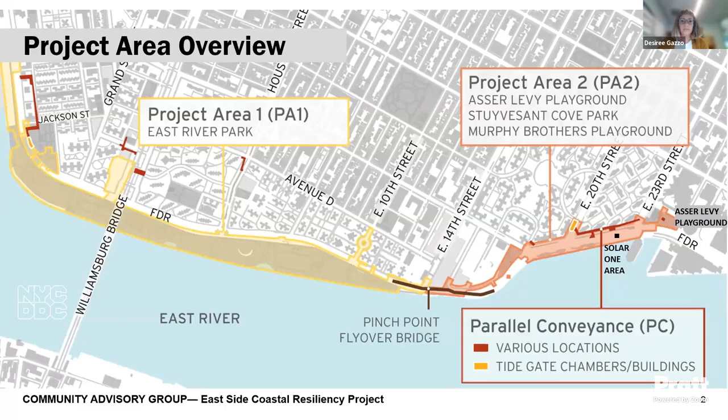As you know, this is the project area overview. The focus area topics that we will discuss tonight are construction, environment, access, hiring compliance, and then any questions.

So for Work With Us events, there have been quite a few this month. On October 4th, we attended the Henry Street Settlement Job Plus in-person job fair. On the 19th, we had the ESCR first quarterly in-person career pathways event.

We had also attended, at the end of September, the ESCR DDC forum which covered the resiliency projects. I don't believe we have the slides for that yet—we just received them, so I'll make sure they're up on the website tomorrow. And then the last hiring event or MWBE event is the Competitive Edge Conference on October 31st, that's on Monday, and DDC representatives will be there as well.

The Henry Street Settlement event, good news was IPC representatives were there and they were able to fill the open administrative position with a local candidate from the job fair. So that was a really great plus for the project. As you all know, we have been coordinating with Henry Street Settlement on many of our quarterly events, so it was really great that they invited us to this in-person job fair.

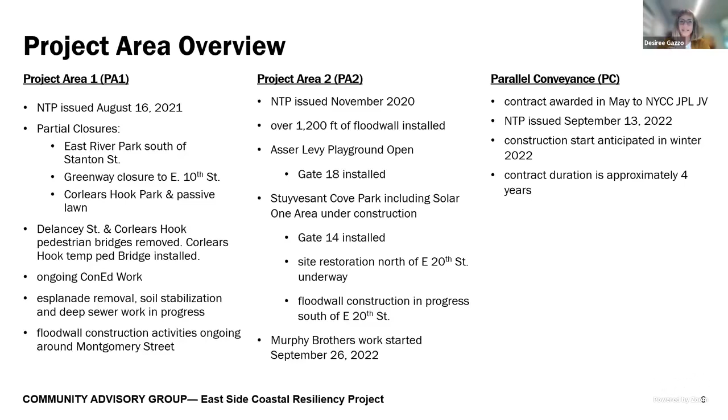For parallel conveyance, we would like to introduce, for those who were not on the CB3 meeting, the community construction liaison for parallel conveyance. Tanya, are you on? Okay, perfect. Tanya, if you want to introduce yourself to the group. It looks like we have quite a few people on tonight, so if you want to give a quick introduction, that would be great.

Sure, good day to everybody. Thanks for having me. My name is Tanya Wokun. My experience in construction began 7 years ago, where I worked for New York State DOT in the rehabilitation of the Major Deegan Expressway Bridge across Yankee Stadium. I worked there as an assistant office engineer and a CCL. Recently, I completed a 3-year water main and gas line installation in Manhattan also. Looking forward to work and meeting you. I would like to wish everybody a pura vida, a Costa Rican saying for healthy and pure life. Thank you for having me.

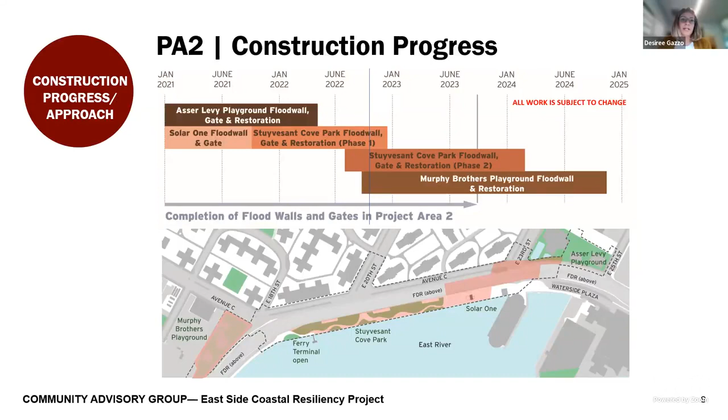For PA2 construction progress, we are moving right along. The Asser Levy Playground is open. Flood wall and floodgate number 18 is installed on the West Service Road. Much of that flood wall construction is completed or near completion, and the floodgate number 17 work is in progress. The anticipated completion for the West Service Road work is spring of 2023, which is really great news for that area.

At the 23rd Street intersection, the utility work and flood wall construction is ongoing. We have 2 gates at that intersection, 15 and 16, so that work is upcoming in the new year.

Down at Stuyvesant Cove Park, the seat wall construction, grading, and finished pavement is well underway, with planting starting the week of October 31st. That's very exciting. The Greenway construction is just finishing up, and that northern part of the Greenway is going to open next week, scheduled to open, and we have slides on that coming up. Before the end of the year, the northern part of Sty Cove Park is scheduled for reopening.

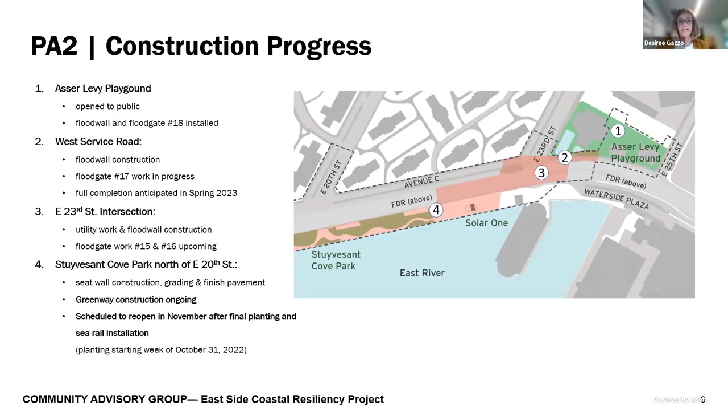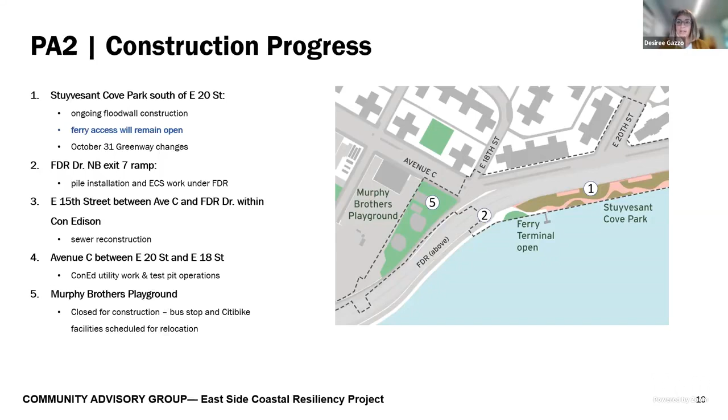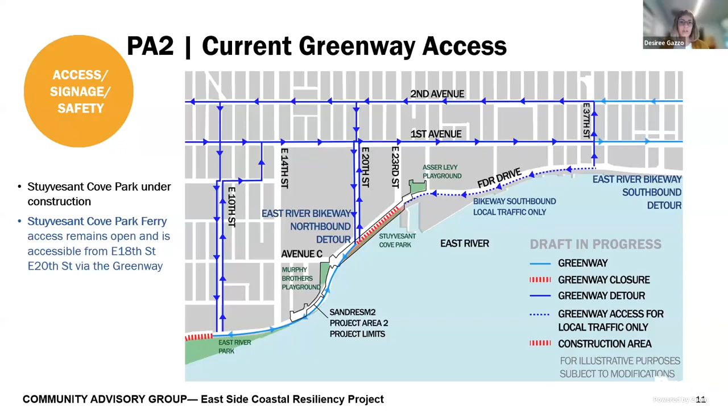So right now, again, we've shown these slides before. We have an update on the next slide, but this is the current Greenway access, which everyone is very familiar with. Starting next week, and the advisory went out 2 weeks ago, the Greenway access will change.

The Greenway north of 20th Street will open, so that's over here, north of 20th Street, and then the Greenway south of 20th Street, from East 20th Street to the East 18th Street Avenue C loop, that part will close. There will still be access to the ferry terminal here, and there will still be access to the southern area, to East River Park, and to PA2 down here.

So this will be the configuration for several weeks, and then closer to probably mid-November-ish, we'll come back with some more detailed closing date. The contractor will need to move into the lower part of Stuyvesant Cove Park, and then that connection will need to close between Project Area 1 and Project Area 2. So then the revised Greenway detour will be activated until that work over there is completed.

And just to zoom in again, once the ferry terminal access closes here, there will likely be ferry terminal access provided from the other direction. I think we're still working on that with the contractor, but that ferry terminal access will be available throughout the construction. And again, we've talked about this work at past CAG meetings as well, but now that it's coming closer, we did want to bring it up again.

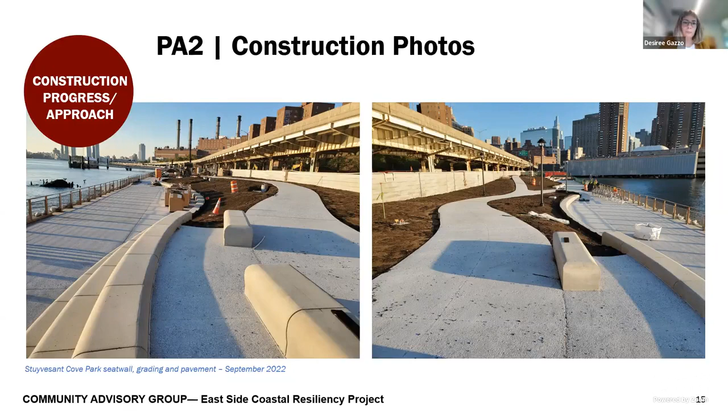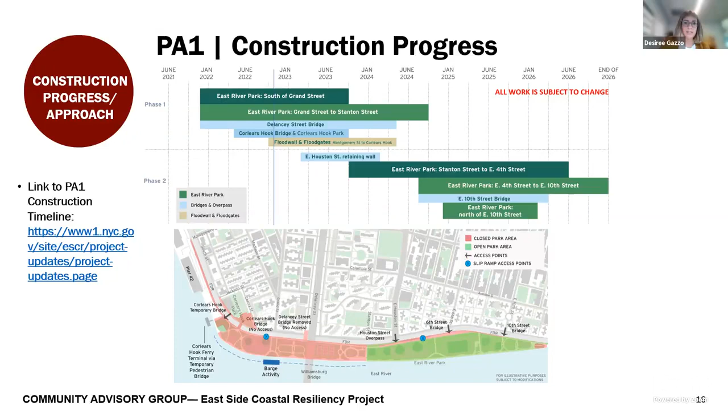For the November 2022 construction activities, again, much of the construction is ongoing out in the field. The soil stabilization activities are still ongoing. The flood wall, which runs under the park, under the fill that's in the raised East River Park, that installation will begin later next month. So that's exciting because we'll have more of the flood wall being installed there.

Again, many of the other items here are ongoing work activities. The Montgomery Street to Cherry Street Greenway flood wall activities are still ongoing, and we have a couple of photos in the next couple of slides. The amphitheater asbestos abatement has been completed, so that's great news too. Work can continue in that area.

A good update, the Con Ed work in the shared use path up at the northern section of the park is scheduled to be completed this year. It had been originally anticipated that that would go into next year, and it looks like it will wrap up this year. We are still having conversations about what that looks like for what parts of the shared use path might be able to open.

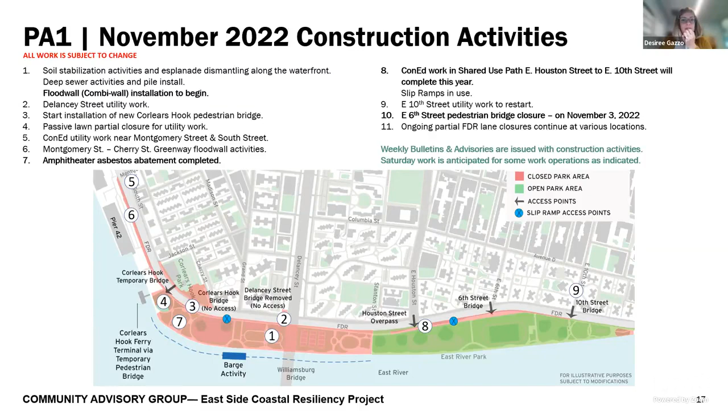Moving into 2023, much of the work we just went over will be continuing. The Delancey Street work is scheduled to pick up to start rebuilding that bridge, as well as work for the Corlears Hook Bridge. The flood wall activities will still continue, and we're hoping to begin flood wall construction near Montgomery Street and South Street at that intersection, also going into next year.

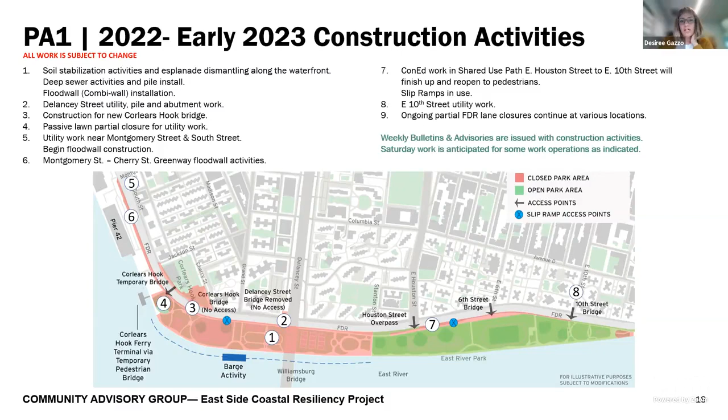As we mentioned about the shared use work, we're looking at what that looks like, what that reopening looks like with the contractor. So much of the work for the beginning of next year will remain similar to what is happening at the end of this year.

Just to go over the work sequencing: the flood wall we were speaking to isn't always in the same spot, but the combi wall is the next step here in the waterfront and Esplanade construction, true to the illustration we've been providing. Then comes the flood wall and pile installation.

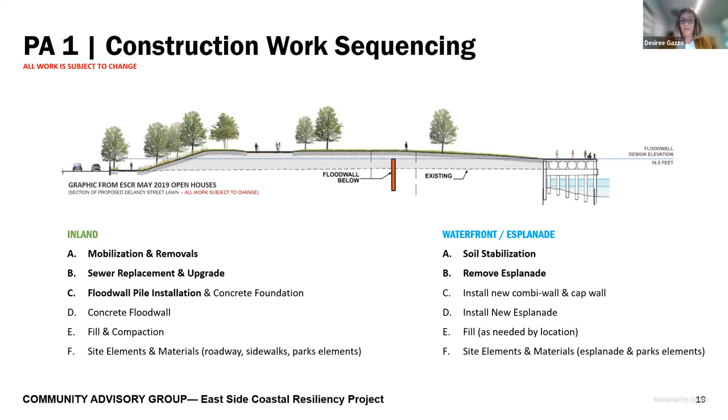Next will be the concrete foundation, and then eventually you'll see the wall. If you look on site, you'll see the mock-ups of the wall they're doing in the middle of the site, which we talked about last time.

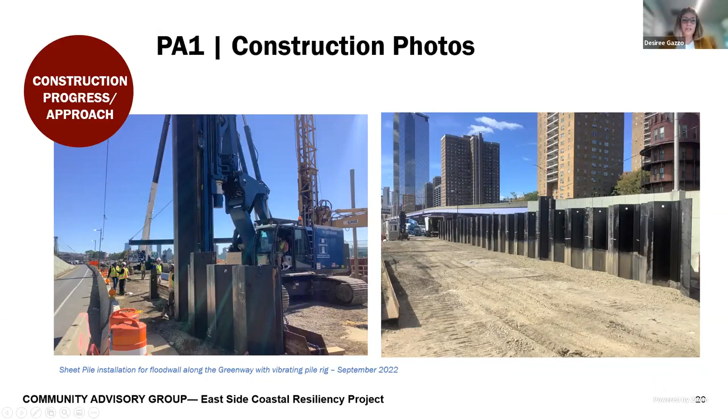So just a few construction photos. These are the sheet pile installations for the flood wall along the greenway with the pile rig, and this is a vibratory rig. It's pretty close to the road, so if you drive over here or live across the street, you have a good view of it.

We wanted to provide some photos for those who are not. This is some of the H pile installation for the deep sewer work. This is the H pile getting lifted up, and then it will be driven down into the ground where the deep sewer work is, to form that frame for the sewer to sit on.

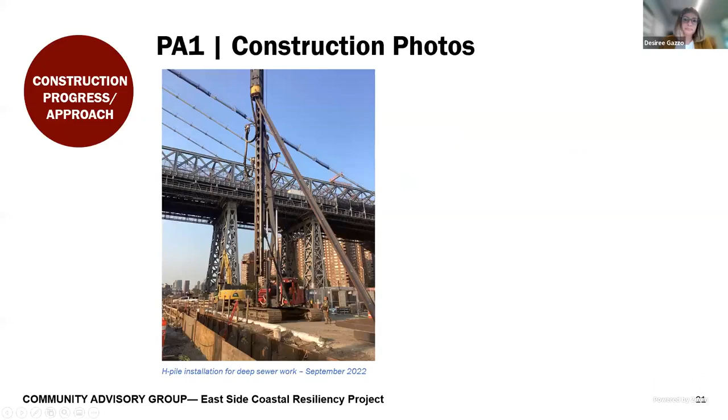Now going into the environmental updates. Taking comments back from last month, we tried to be more specific with the locations of some of the exceedances. The PM daily value did not surpass the PEL for the month of September for PA1 or PA2. Many of the alerts we received were around the 15-minute mark or less, and again it was due to construction activities, with dust suppression techniques applied.

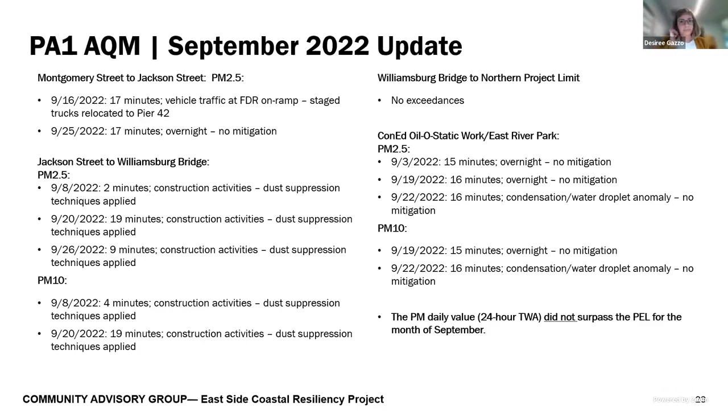Some of the work down by Montgomery Street to Jackson Street was related to the Pier 42 work going on there. There have been complaints about many trucks in that area, but those are not ESCR trucks, so the one or two exceedances there were in relation to the Pier 42 trucks. Many of the other ones were due to typical construction activities, and additional dust suppression techniques were applied. I hope that helps a little more.

So it wasn't concentrated in any one particular area, which I think was the question that was kind of asked last time. So we tried to speak to that in the slides a little differently than last time.

And we didn't take questions in the middle because that's it, that's the last slide, and we could take questions now. It was a relatively short presentation with not a lot of new information, so we didn't break it up halfway through like we do sometimes. So I hope that's okay. And then we could take any questions if there are any.

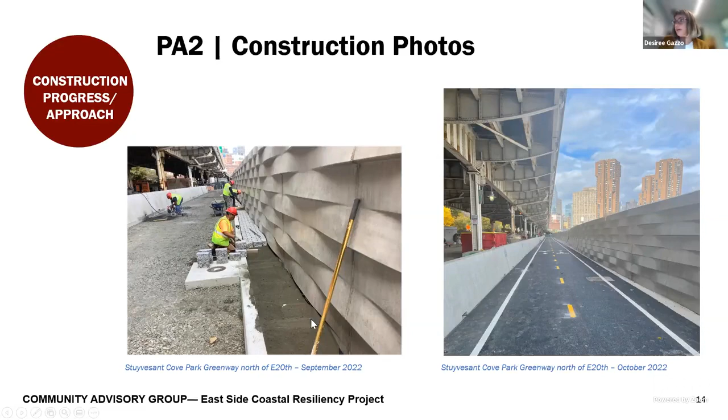So it's the same as it was previously. The access to the greenway is at 20th and 23rd. Let me see, where's that, better? Right, so the greenway is here, the exits are still at 20th, 18th, 23rd. Any entrance to the park for a pedestrian is the same as the access to the greenway. I'm sorry.

Okay, so we have to advocate with someone else to get that removed, I guess. Yes. Okay, thank you.

Wendy: I'm getting questions related to Pier 42, which I understand has now been transferred to Parks. The questions are about the turf and the little pellets that are quite visible in the turf. I sent a question to the online inquiry tool a couple weeks ago and haven't received a reply yet. Can you fill me in on that?

Sure. So Wendy, Pier 42 isn't under ESCR. You would need to contact the CCL for Pier 42, which is Rick Fogarty. I believe we've provided his information in the past, and certainly Joyce, if you're on, can you pop Rick's information in the chat. He would be the person you'd reach out to for any Pier 42 questions. I don't believe I saw the inquiry come in, but I could certainly check again, because I believe we are caught up on most of our inquiries, especially if it was a couple weeks ago, but I will double check on that.